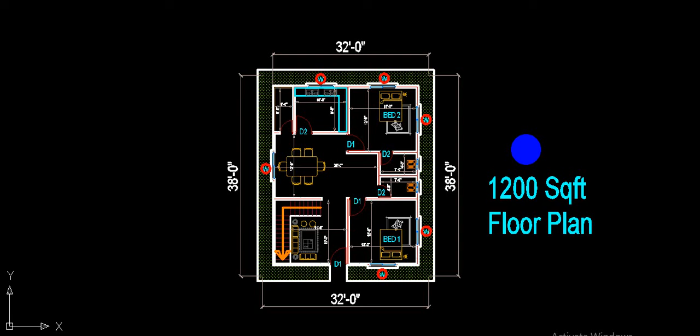Today I'm gonna explain a 2 BHK house plan in 1200 square feet.

So viewers, this is basically our floor plan. This is our front side, this is our back side - the distance between them is 32 feet. This is our right side, this is our left side - the distance between them is 38 feet. Overall, our floor plan is 32 feet by 38 feet.

If we talk about square feet, it's around 1200 square feet.

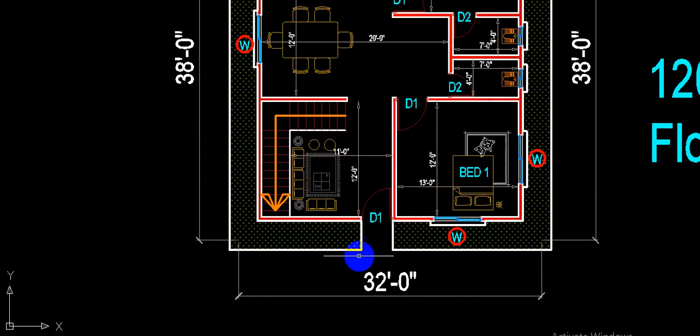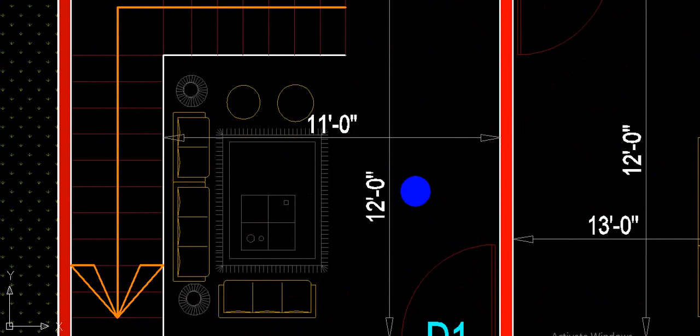So viewers, this is basically our main door, labeled D1. D1 door is 3 feet 4 inches and we are using it as our bedroom door as well as our main door. Using this main door we will reach here, and this is basically our drawing room. On the left side we also have our staircase.

In our drawing room, we have this direction 11 feet and this direction 12 feet. Overall our drawing room is 11 feet by 12 feet. On this side we have our staircase, and using this direction we will reach our second floor.

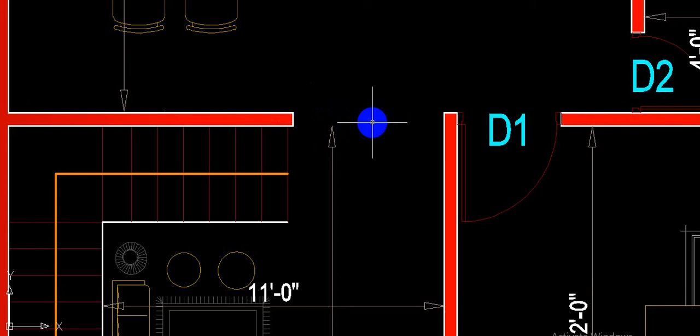After here, you can understand this space is basically open, so you can use a slide glass door or a curtain for separation, and if you want you can just keep it open here.

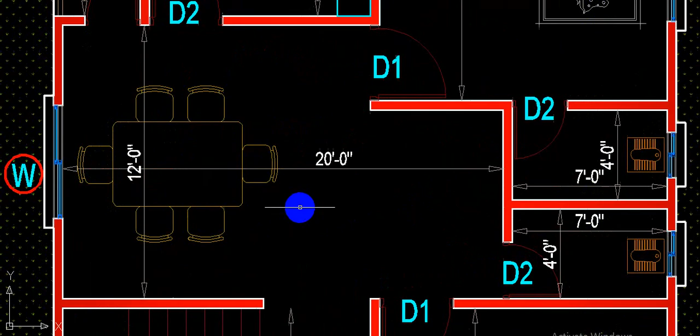After here, you can understand this is basically our dining room. We have this direction 20 feet and this direction 12 feet, so overall our dining room is 20 feet by 12 feet. Our dining room also has one window, and this is basically our window.

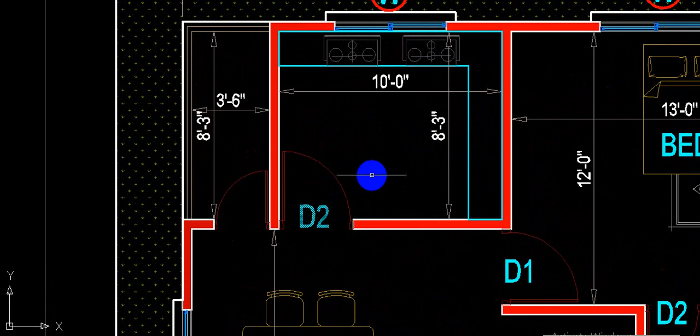Using this D2 door we will reach here, and this is basically our kitchen room. We have this direction 10 feet and this direction 8 feet 3 inches, so overall our kitchen room space is 10 feet by 8 feet 3 inches. Our kitchen room also has one window, and this is basically our window.

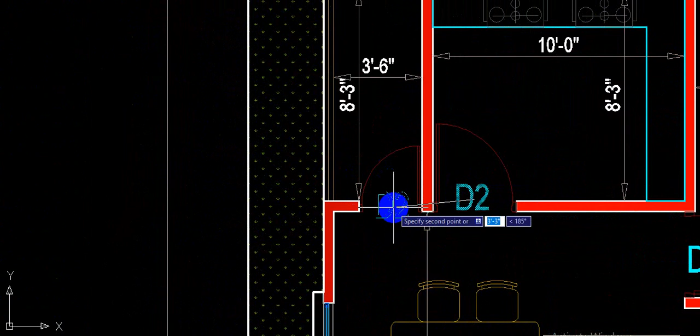After, we get back to our dining room, and on the kitchen room's left side we have another D2 door. Using this D2 door we will reach here, and this is our balcony. We have this direction 3 feet 6 inches and this direction 8 feet 3 inches, so overall our balcony measurement is 3 feet 6 inches by 8 feet 3 inches.

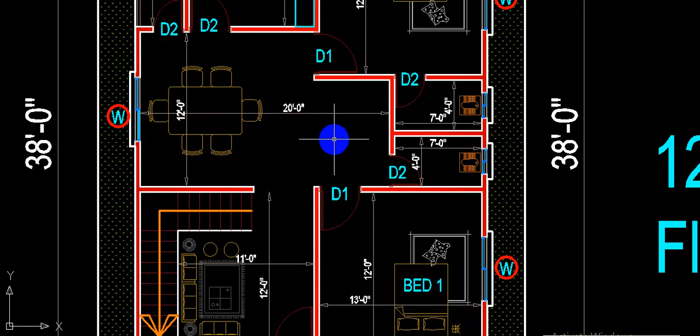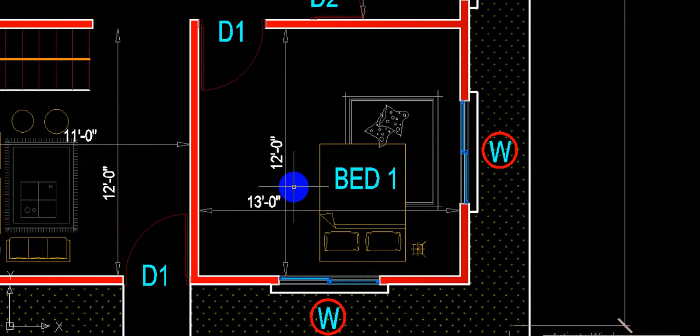After we get back to our dining room, on this side we have our D1 door, which is 3 feet 4 inches, and we are using it as our bedroom door. Using this D1 door we will reach here, and this is basically our bedroom 1. We have this direction 13 feet and this direction 12 feet, so overall our bedroom 1 is 13 feet by 12 feet. Our bedroom 1 also has two windows - this is one window and this is another window. Our bedroom 1 doesn't have any attached toilet.

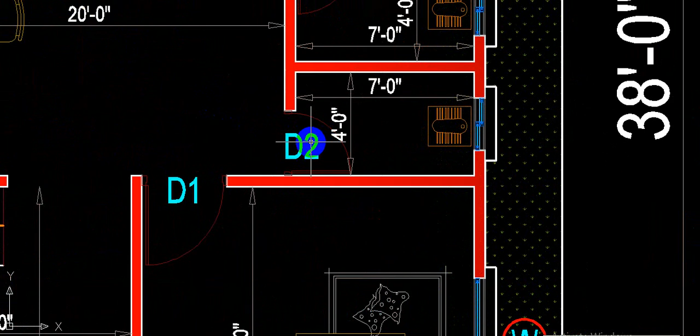After getting back to our dining space, on this side we also have another D2 door. Using this D2 door we will reach here, and this is basically our common toilet. We have this direction 7 feet and this direction 4 feet, so overall our common toilet is 7 feet by 4 feet.

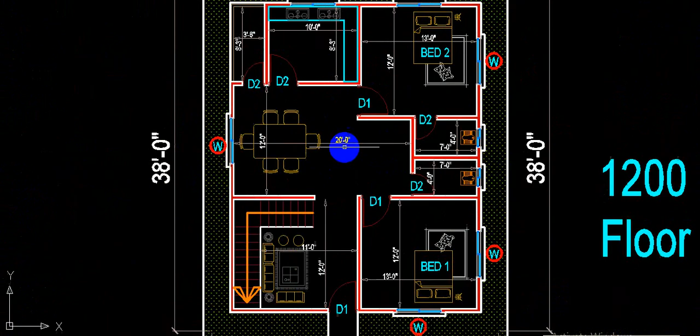So viewers, we get back to our dining space. After, on this right side, we also have our D1 door. Using this D1 door we will reach here, and this is basically our bedroom 2. So this is our bedroom 1, and this is our bedroom 2. Our bedroom 2 measurement is this direction 13 feet and this direction 12 feet, so overall our bedroom 2 is 13 feet by 12 feet. Our bedroom 2 also has 2 windows - this is one window, this is another window.

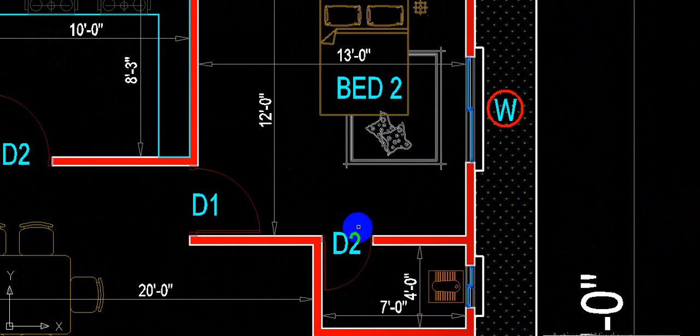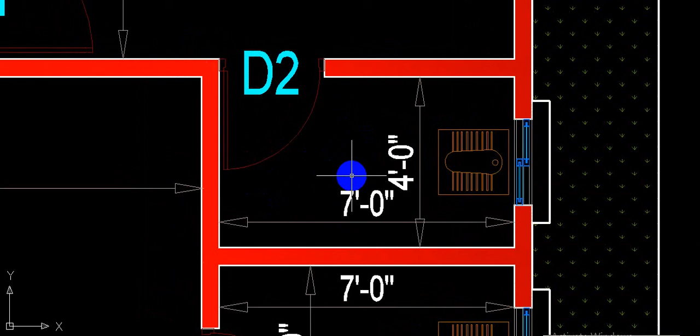On this downside, you can understand we have our D2 door. Using this D2 door we will reach here, and this is attached with our bedroom 2 - this is our attached toilet, not common toilet, I'm sorry. We have this direction 7 feet and this direction 4 feet, so overall this attached toilet is 7 feet by 4 feet. This toilet is attached with our bedroom 2.

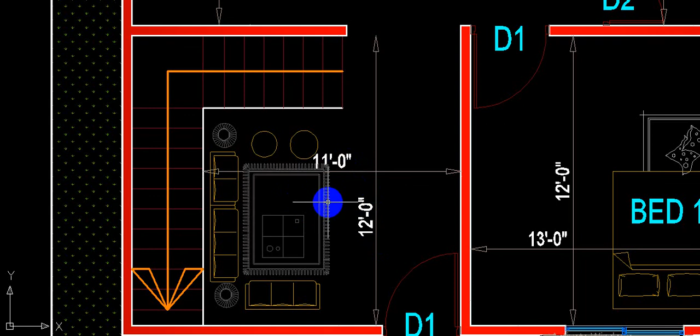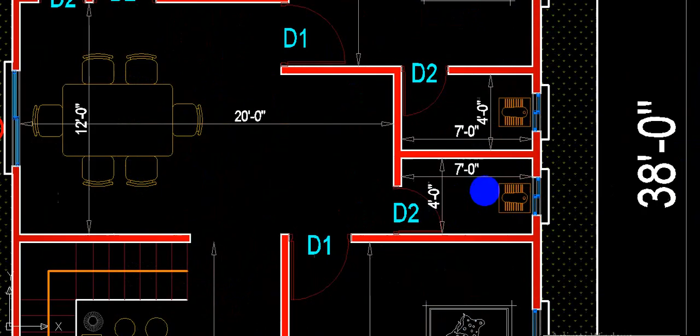After, we get back to our dining room. So viewers, let me give you a little overview for more understanding: using this main door we will reach here, and this is basically our drawing room. Our drawing room and staircase are both at the same place - using this direction we will reach our up floor. After here, this is basically our dining room, and on this side this is our bedroom 1 and this is our common toilet. After here, this is our bedroom 2, which has one attached toilet - this is our attached toilet. On this side, this is our kitchen, and this side is our balcony.

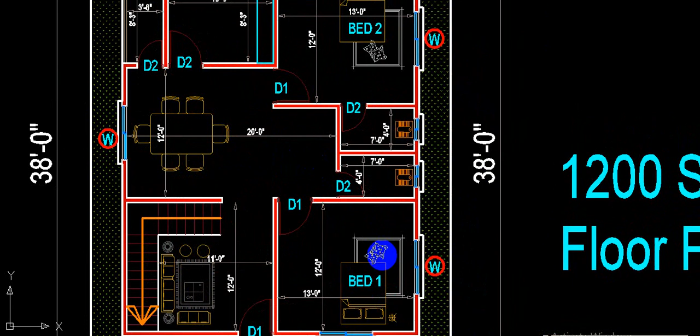Overall, what we are getting is this 1200 square feet floor plan. Basically we have one drawing room, with our staircase at the same place. We have one dining room, 2 bedrooms, so 2 bedrooms and 2 toilets - one toilet is common, another toilet is attached with bedroom 2, and we have one kitchen room and one balcony. Overall: 2 toilets, 2 bedrooms, 1 kitchen, 1 balcony, 1 drawing room and staircase at the same place.

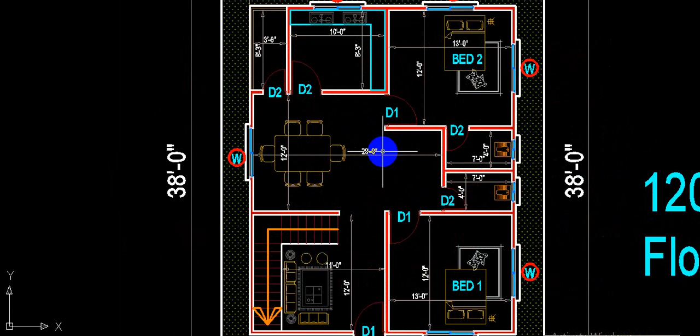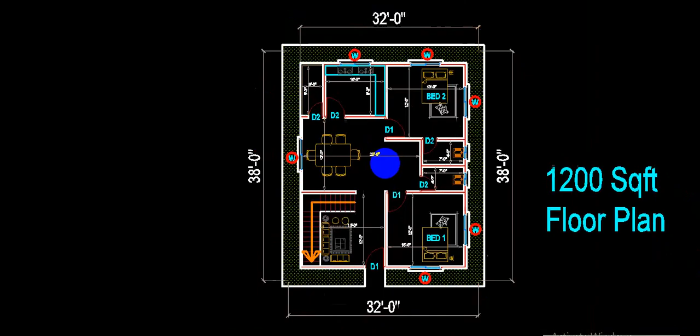So now we will talk about the cost. Viewers, cost is basically variable because it depends on your state, your location, your soil capacity, which kind of structure you want, and which kind of material you want. So everything depends on that, that's why cost is variable. Let's just talk about a very basic cost, an average cost - here you can understand the cost is around 18 lakh rupees. Yes, definitely cost is variable because it depends on which kind of structure you want and your location, as I told you. That's why cost is variable.